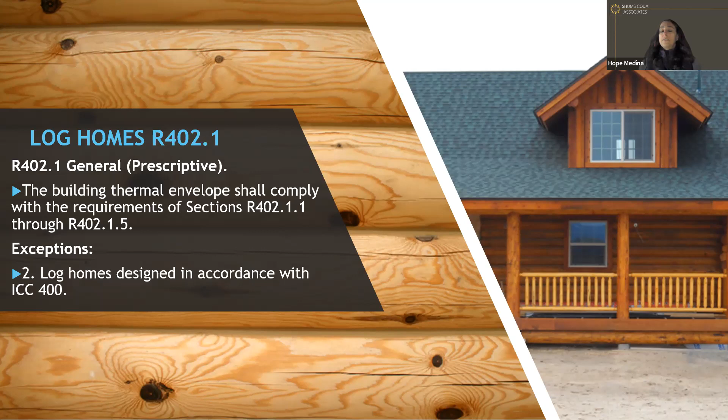So if it happens to be designed to that, whether you're on the 18 or the 21 IECC, they'll need to be designing to ICC 400, the 2017 version. Now the 2022 version just came out, but neither of those are referenced in the 18 or the 21. Also, be aware that this option for log homes and the exemption on the thermal envelope is only an option for residential projects.

So let's dive into what this standard is all about. ICC 400 is a standard that talks about the design and construction for log structures. As you can see here, it incorporates a little bit on the residential side and a little bit on the commercial side. But the only exemption is on the residential aspect, so that's what we'll be focusing on today.

So what we are going to be looking at right now is how do we deal with that thermal envelope. The intent of having that log home is so you have that outdoor log cabin feeling, where you can see the wood as you're sitting on the couch. That's the intent, not necessarily that it's been furred out so you can get insulation in the wall and have drywall. The intent is to have that aesthetically pleasing feeling of log homes.

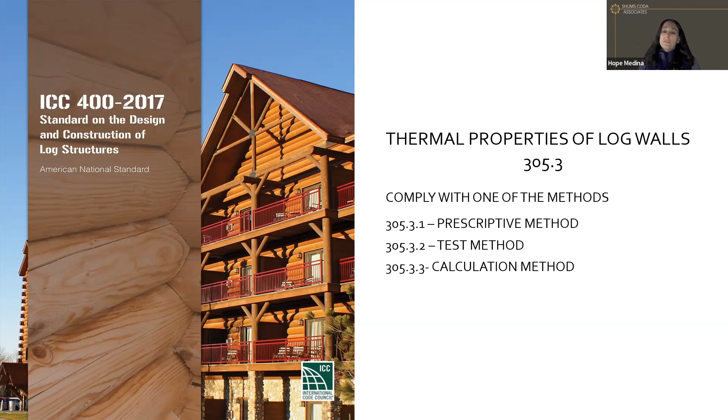So with that, how you deal with the quote-unquote R value, you have three options you're going to comply with: one is the prescriptive method, one is the test method, and one is the calculation method. Let's take a look at that a little bit further.

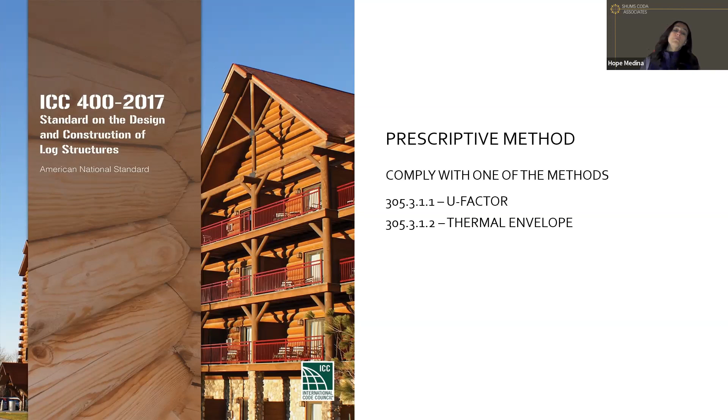When we talk about the prescriptive method, you're going to utilize one of two options within that method. You have the U factor method, and you also have the thermal envelope method. So you're either going to comply with section 305.3.1.1, or you're going to comply with 305.3.1.2.

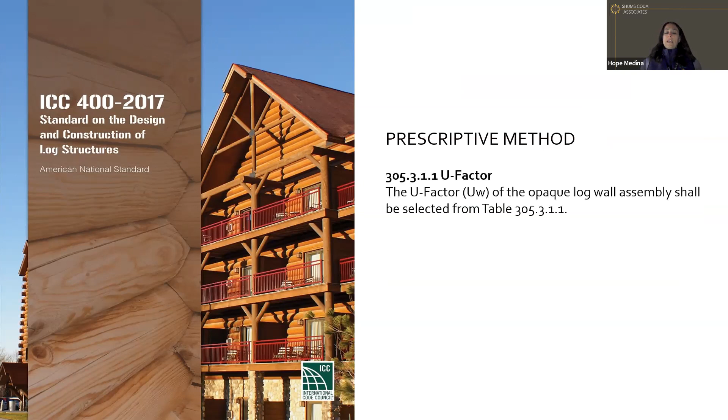305.3.1.1, which is the U factor, is talking about how the assembly works, and you're going to take a look at what you find in Table 305. This table is a little bit more complex than maybe what we're used to, because there's a lot involved with it.

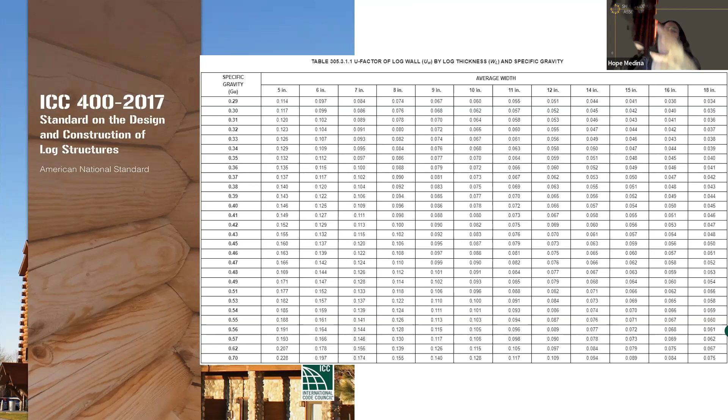So you're going to take a log, and you'll need to know what the average width of that log is going to be. That's something that should be provided on the plans. From that log, you're going to see the U factor shown here — it's a 0.0 number, and of course the lower the number, the better it is. But let's take 10 inches as an example, so we see that column for 10 inches. On the very left-hand side, you have the specific gravity, which I believe is talking about the moisture content that you're going to find in that log.

All this is provided for you as code officials — that information is provided for you. So if they are utilizing a specific gravity and it happens to be 0.29, and they are at 10 inches, then they are deemed to be at 0.060, and that's how this table is going to work.

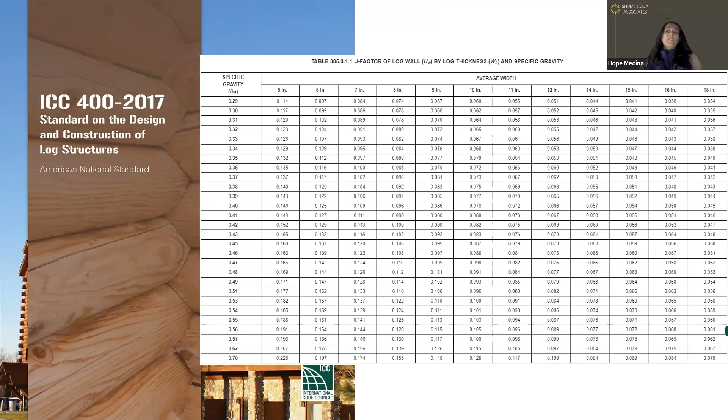Now, the thermal envelope component of it is probably a little bit more familiar than what you've seen in the past. This one looks very familiar to what we've seen within the IECC, right — Table R402.1.2 or 3, depending on which edition you're in.

We have our climate zones — we know what climate zone we're in. Now we're going to take a look and see for our log wall, it tells us what our diameter is, right? So if you are in climate zone 5, your minimum diameter of log has to be 5 inches, and it has to have the SG — the specific gravity we saw on that left-hand side — equal to or less than 0.50. Or you're going to have at least a 7-inch log, and then you can have your SG greater than 0.50.

And then, of course, you're still going to have to do your fenestration.

So you're going to follow that table. Do you have fenestration? Do you have skylights? The solar heat gain coefficient, is that part of it? All of that has to come in. And then you have your ceiling R value.

Now your ceiling R value is going to have a requirement of an R49. I know quite often there's still that desire to have that aesthetically pleasing feeling of the ceiling or roof. What I will say is these tables address walls as far as log building, and being able to use the different various sizes of log walls, but they don't really address what size of log can we utilize for our ceiling to have this particular value.

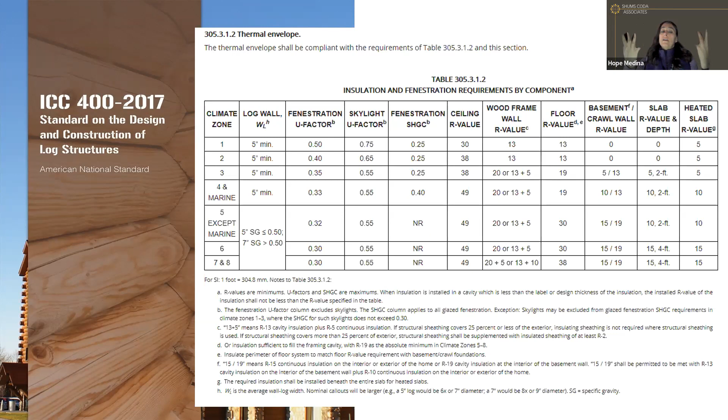So with that, it still states that you are going to need to have an R49 in climate zone 5 as your ceiling value. Now that doesn't mean you can't do it above deck and have it above deck, so you still have the aesthetic look of the wood, log, for that, but you will have to have something in place for that.

And then, of course, if you do fur out your walls and you are going to use wood frame walls, now you're going to do the R20 or 13+5, which we're very familiar with, and it's pretty similar to how you would look at it. So are your floor values, so are your basement wall values and your crawl wall values, and then your slab R value. One of the columns that, if you notice on here, is that heated slab R value.

Now that is different than the typical table that we're used to. It does have the value of a heated slab, and it states that you're going to have that R, in this case R10 continuous, completely under slab if you're going to have a heated slab.

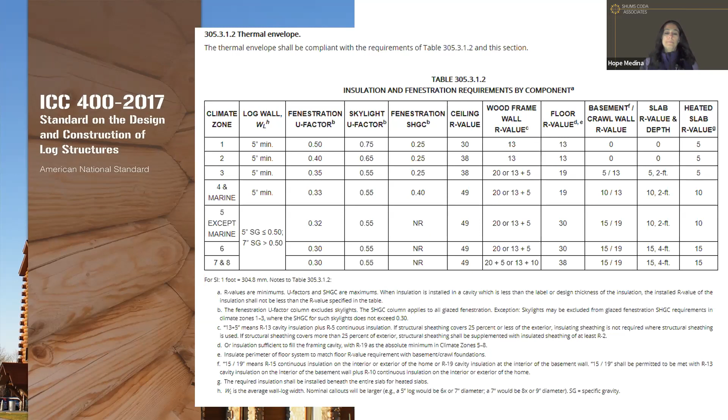So the second option that you have is going with that test method. If you don't want to mess with those tables and trying to figure out what your specific gravity is for your logs, then you have the option that you can do this test method. And what it is, is a physical testing of what that thermal resistance is going to be. And then there are some standards that are involved.

So the ASTM C177-19 is the standard test method for heat flux measurements and thermal transmission properties by means of the guarded hot plate apparatus. And then you have two other tests that are going to deal with various other components of it. And then you have this very lovely... sorry about that.

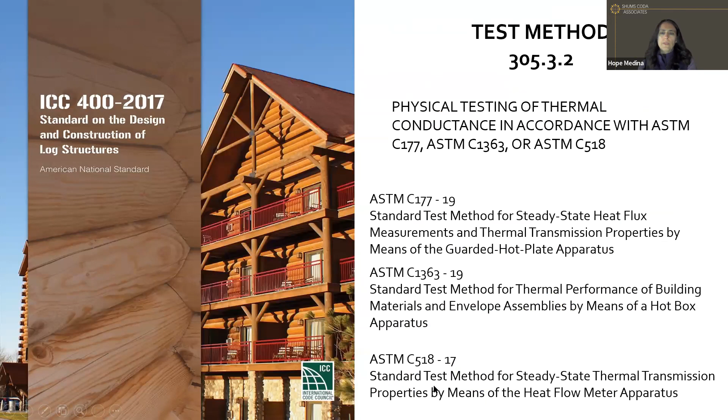Okay, we're not touching it here.

And so now we have the calculated method, and the calculated method is where you're going to start taking the coefficient of transmission of the log walls and using these particular equations. There's a very in-depth calculation that will need to be performed, dealing with inside film, outside film, size of log, the percentage of the wall that's going to be considered, that's going to utilize log. And all of this goes into this particular calculation.

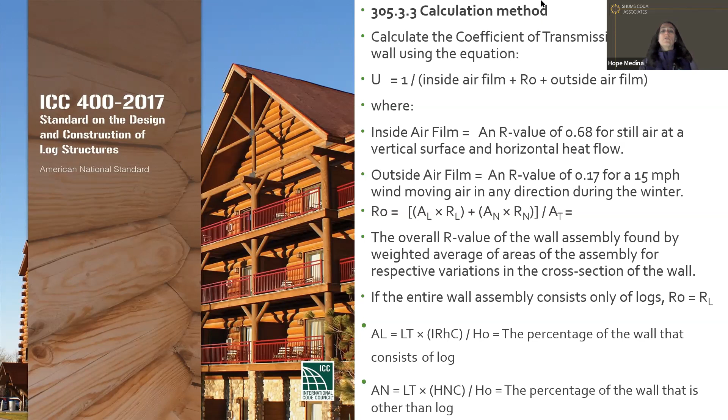Again, as a plans examiner, inspector, or builder, this wouldn't be required of you. It should be presented to show that you meet these requirements for it. And so here we go. And then here's the remainder of that particular calculation that will be utilized.

Now that we've discussed a little bit of how to determine the, quote unquote, insulation values that typically we would just see that lovely little R value on that pink insulation that makes it very easy for us to do, we still have to take into account there are other components within that thermal envelope, one being air infiltration. And I think when everything is said and done, I really feel that ICC 400 does a fairly good job in being able to address those concerns or issues.

And if you recall, if you go into table R402.4.1.1 of the IECC, that's your air barrier criteria and insulation installation table. You'll see that there's a footnote that says that log homes, when designed to ICC 400, are exempt from the air leakage requirements that you would find and required out of that particular table. And that's because they have this nice little section that deals with it.

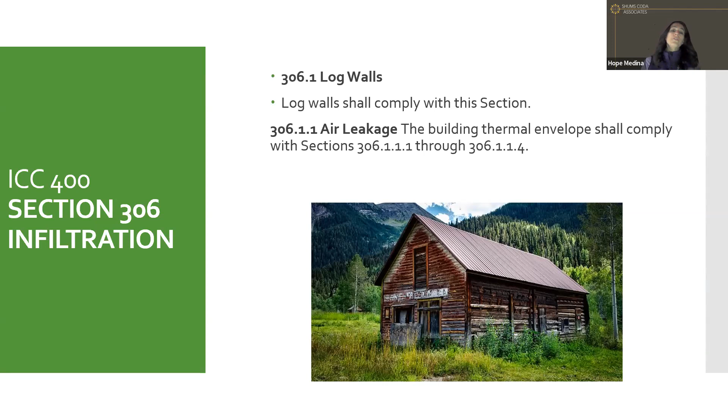So it states in here that you are going to comply with sections 306.1.1.1 through 306.1.1.4. So let's go ahead and take a look at what some of that is.

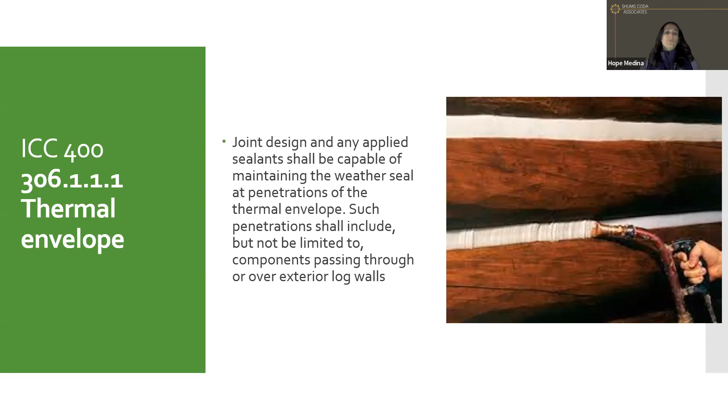So part of this talks about how you need to figure out how you're going to deal with your joints. You're going to need some sort of sealant that has to be capable of maintaining the weather seal of what's going on there, and also has that limited air movement capability. You also have to take into account the penetrations coming through this, and those penetrations need to be sealed in a way that can withstand weather and air infiltration.

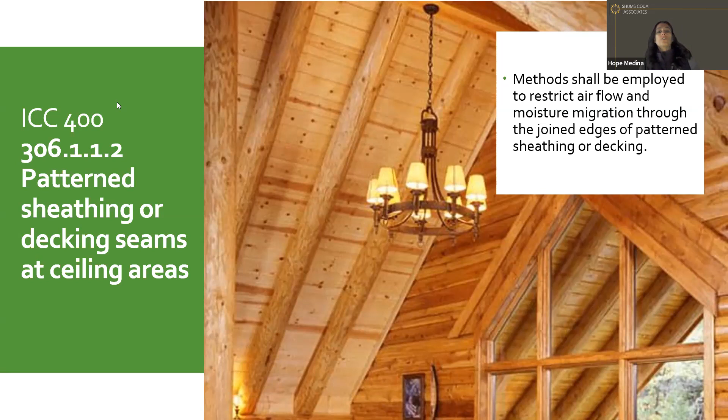Here's where the question comes into play again when talking about sealing. They state you're going to have some sort of pattern sheathing or decking seams that you'll have to address, because you don't want to leave a gap where air can come through an exposed area. You'll have to use some method to restrict that airflow, and also not allow moisture to enter into that structure.

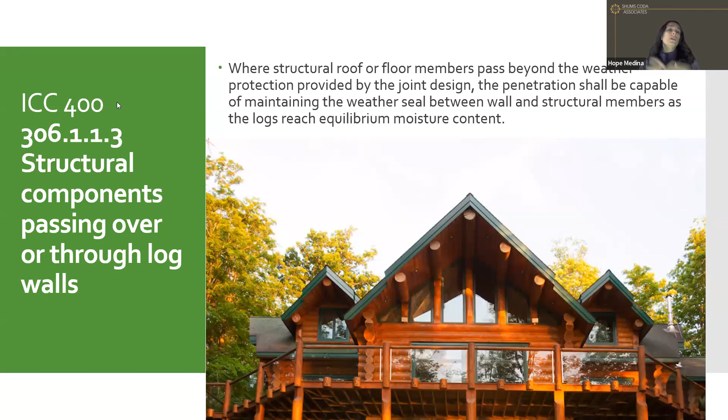Anytime you have logs, because you want that aesthetic look, often you'll see logs that go from one end of the house all the way through the other. So if you have any type of structural roof members, or flooring that penetrates through the log walls - like in that image, where the ceiling logs go all the way through the log wall - you have to make sure those penetrations maintain the fact that no moisture or weather can come in, and it also has to have a very good air sealing component.

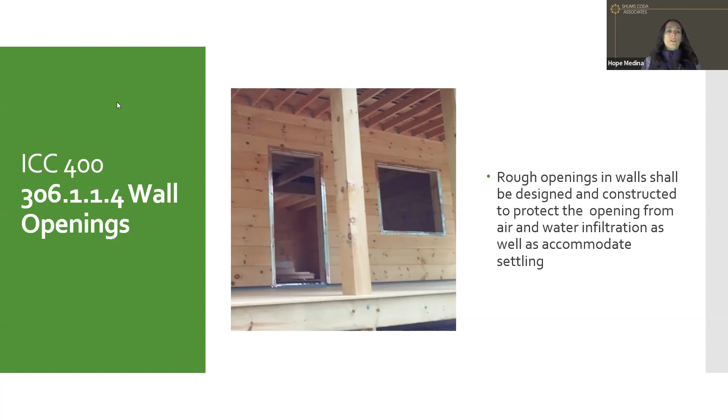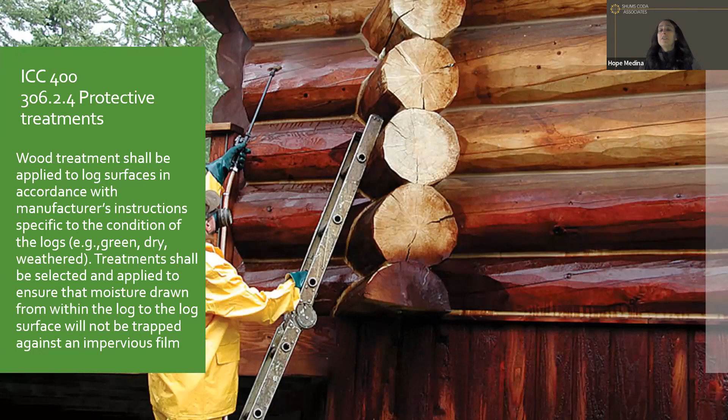Okay, so that was all the fun and excitement we had about log homes. I hope it wasn't too scary, because when everything is said and done, it's just the thermal envelope that's slightly adjusted and a bit different than what you'll see in the IECC, but your mechanical is still going to all comply, your lighting is still all going to comply, your service water heating requirements are all going to comply. The only thing that's slightly different is your thermal envelope.

So, shipping containers. I don't know about any of you out there, but I've had the fun and excitement of doing a plan review for shipping containers on the residential side, and it's a very unique concept that's really starting to take off, because it's deemed to be more of a sustainable practice, resilient practice, green practice, however you want to look at it. But it's coming into play, and with that there are a lot of questions on what you need to do, because there isn't a very specific section within the IECC, whether residential or commercial, on how you're going to deal with that.

So when we talk about shipping containers and the residential requirements, the things you think about are: okay, so I need to know how that thermal envelope is going to work, the systems, whether that's service water heating and mechanical, however it's going to be heated and cooled.

The electrical power and lighting systems, that's going to be something that's looked at. And then of course, if you happen to be under the 2021 code, your additional efficiency package options. Those are going to be very unique in how they're going to be applied when it comes to shipping containers.

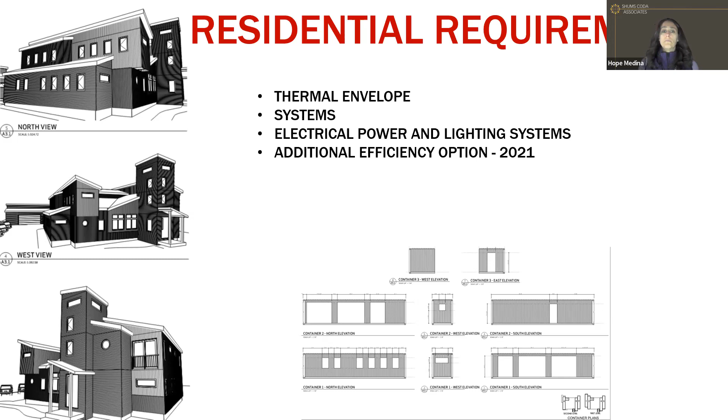And when we talk about commercial, it's the same thing here too, right? You're still going to be looking at whether or not that building thermal envelope meets everything, with the insulation, air leakage, all the fun stuff. The mechanical systems are still going to have to comply with it. The service water heating, electrical power, lighting systems, the additional efficiency package, and maintenance and commissioning, if it is required to have the commissioning for it.

And the image that you see there is, I'm trying to think of how it's called, I think it's called the Shipping Container Mall. It's an outdoor mall completely comprised of shipping containers. What you see there was the elevator that was utilized for that. So, you can use these, and they're getting used.

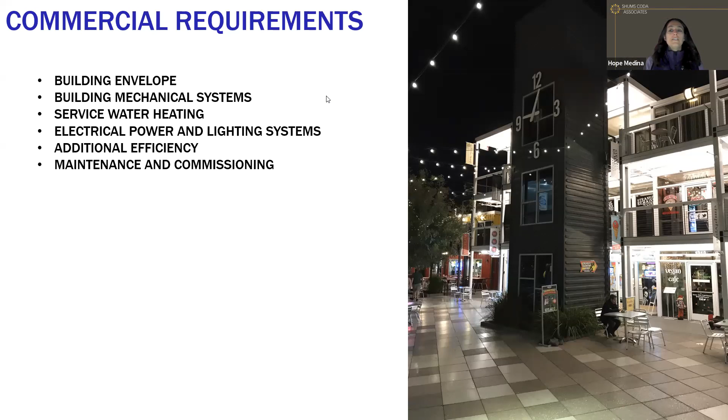So what are the things that we need to talk about when it comes to shipping containers? I think probably the biggest question is, what are you doing, whether you're designing them, reviewing them, building them, or inspecting them, when it comes to the thermal envelope, right? Because there's a lot of questions. There isn't, like I said, there isn't a table that says, hey, use me for shipping containers. There's nothing labeled shipping container table, thermal envelope, the components.

So what is it that you're going to use? What do you need when it comes to your insulation requirements? I've had several discussions actually with ICC, and the approach that is really being recommended - residentially, they're saying that if they're going to utilize the shipping container and it's going to be a component of an assembly, that really how you should be looking at it is using either table

402.1.4 if you're in the 2018, and 402.1.2 if you're under the 2021, which is your U factor table, that assembly approach, right? You're going to take the metal sheathing, that metal exterior of the shipping container, and then whatever type of assembly that you're going to utilize, and add everything together to see what it is and how it's going to meet these particular values.

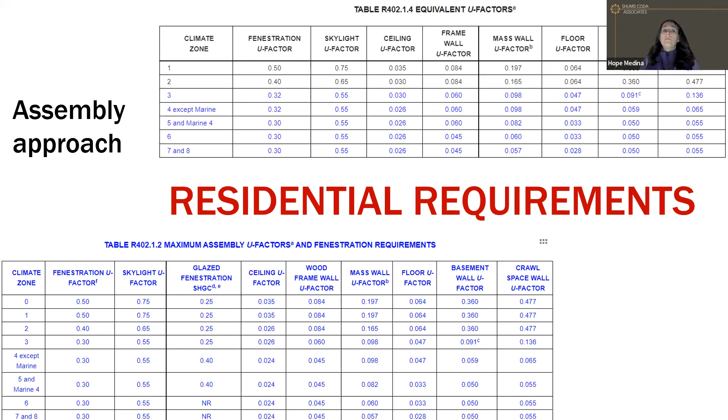So you have to keep in mind too, if you're designing or doing a plan review, are you trapping moisture in a wall, right? So we want to make sure that the walls have the capability, if some sort of moisture gets in, that it's able to escape. So that's where really thinking about how that assembly approach is going to work.

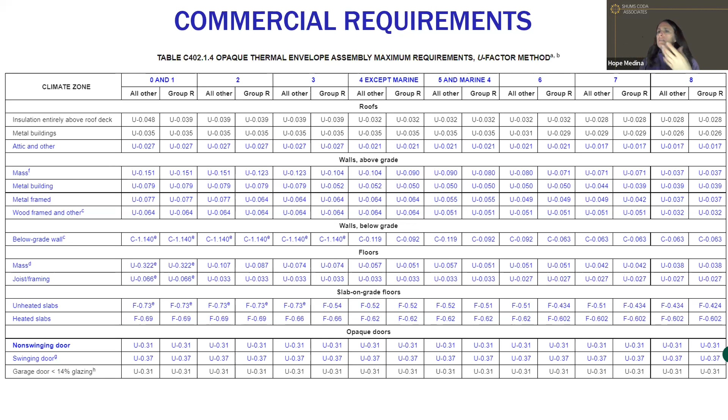Now, the other thing that you have to think about is air barriers, right? It's not just black and white as far as how you deal with this type of material and structure, and make sure that you comply with how the air barrier and air sealing is set up. So let's talk about what you're going to do on the residential side of things.

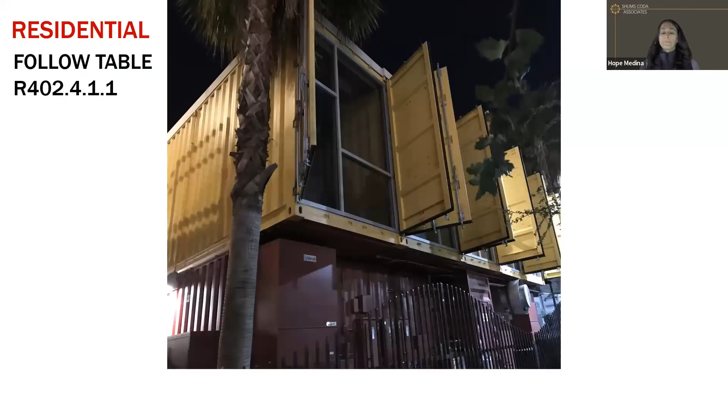So residentially, you are just going to follow table R402.4.1.1, right? That's the lovely table that gives you the component, and then tells you in the next column your air barrier criteria.

So you have, let's say, your ceiling. Well, your ceiling is now going to have to make sure that the air barrier in any drop ceiling or soffit shall be aligned with the insulation, and any gaps in the air barrier shall be sealed, and the access openings, any drop down stairs or knee wall doors to unconditioned attic space shall be sealed. So if you have that condition in that shipping container, that's what you're going to do.

But basically, you're still following this table, and it's going to get you to being able to do a blower door test, right? Because that's the intent of this, it's a roadmap to lead you to success. And it doesn't change if you happen to have a shipping container. There's no exemption saying, hey, you are exempt from the blower door test if you utilize a shipping container for your home. So with that being said, you're still going to want to really follow the components and the information that you find.

And in some of the areas, you probably are going to want to follow it very, very closely. So you have that shipping container and you've got your nice tub that you like to relax in, have some music on, candlelit, and just decompress from the day. You don't want the cold air and the coldness from that metal that's your exterior now, basically sucking all the warmth out of that tub. So you're going to make sure that you've got that air barrier, you've got that insulation there so that you can still enjoy the warmth of the tub.

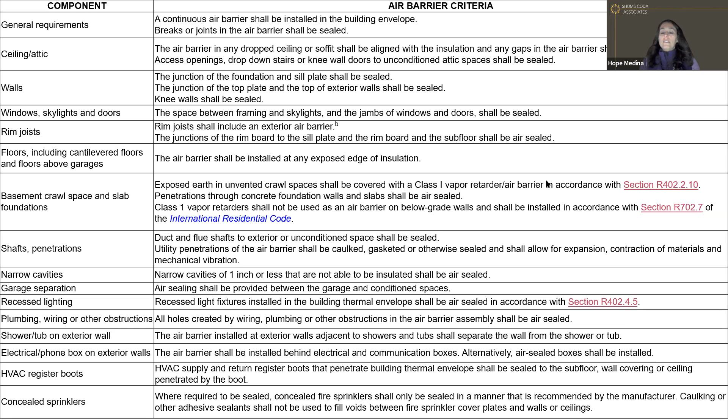And so there's probably a little more things that you might really focus on a little bit more dealing with that steel metal structure. Now, when we talk about the commercial side of things, this is where it kind of gets a little bit more complex than on the residential side.

And so if you are in the 2018, you're going to follow C402.5, which is the typical air leakage section. Now, for the 2021, again, you're going to utilize C402.5, but remember that air leakage testing may be required for these. So you have to keep that in mind and you have to really kind of think it through.

And so for the 2018, you still have the option and you are still required to either utilize the material option, which in the IECC, you have those 16 already deemed to comply materials that can be utilized. It does have sheets of steel that's on there. I'm not sure that this would necessarily comply with that, but it's something to maybe keep in mind, or the assembly approach, not necessarily seeing that there's going to be an assembly approach used for the shipping containers, or you can do the testing.

Now in the 2021, again, you can do the material, or you can do the assembly, or you can do testing, but for certain occupancies, it is required that you have to do the testing for it. So whether you use material or assembly, you are going to be doing testing. And then also keep in mind too, that the building envelope performance verification is going to be required. So these are all things that you're going to have to keep in mind when you start thinking about what you're going to do for air leakage on the commercial side with the shipping containers.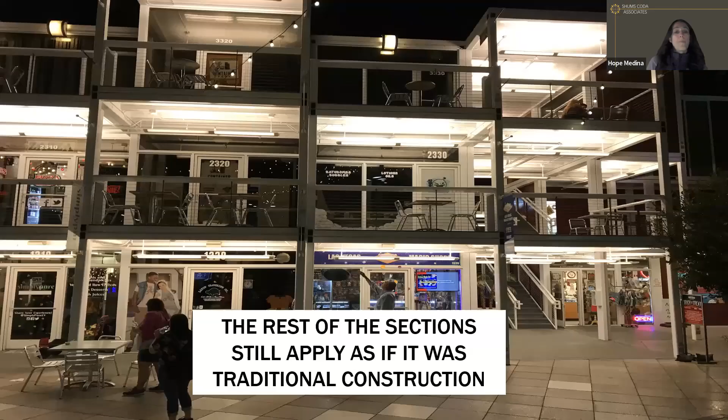Other than the thermal envelope components, the rest of this is going to comply with the remainder of the IECC, meaning your mechanical is going to comply with the mechanical code. You're going to have to do your load calculations, whether it's a commercial load calculation or a manual J calculation. You're going to need to do your service water heating, any of your electrical, doing your watts per square foot, or the amount of high efficacy bulbs installed, whatever the case may be. Those still apply as if this was traditional stick framed construction, so all of those still comply.

Where there's any sort of question, it really comes into play for your thermal envelope components.

All right, car washes. I get questions quite often about car washes, and there's a lot of reasons for that, because everybody thinks about this and they're doing their due diligence, wanting to do what's right when it comes to energy and dealing with this unique question. So why are these car washes such a great question?

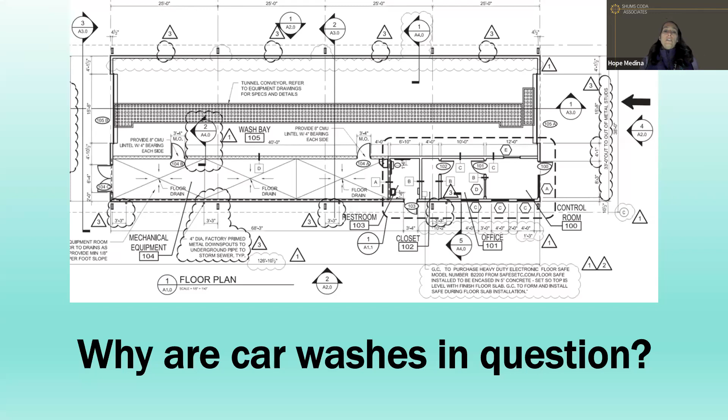The reason for that is, when you look at this, what do you see? You're seeing that there's a question about whether it's going to be conditioned, and where that thermal envelope is going to be at. The thought is we're trying to make sure everything is insulated where it should be, everything is sealed where it should be, and that we don't have really big holes in our thermal envelope. But what does a car wash have? We have a nice little giant hole on one end of the building where the vehicle enters, and then another giant opening on the other side where the vehicle leaves the car wash.

So there's a lot of questions. What happens? What do I need to look at? What's all involved? I think one of the first things you have to figure out is, are the spaces being conditioned?

So, there we go. This particular area on this plan, you can see there's offices, there's a bathroom, there's a control room. Those are areas that are probably, one way or the other, going to be conditioned. And then you have other questions, right?

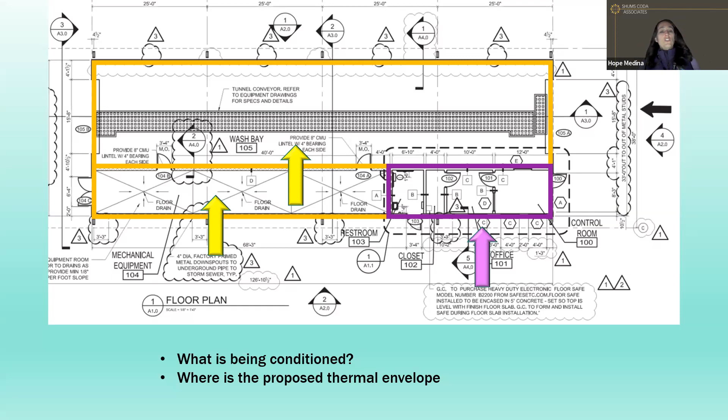If it's going to be conditioned, then chances are it is going to be required to have a thermal envelope, but maybe it isn't. So if that particular space, basically where the cars go through, may qualify as a low energy building, and if it happens to be separated from the remainder of the building that is actually conditioned, it would be exempt from that thermal envelope. So that top yellow area, if it meets the requirement of 3.4 or less BTUs per hour per square foot, or 1.0 watt per square foot of floor area for space conditioning, it is exempt from the thermal envelope.

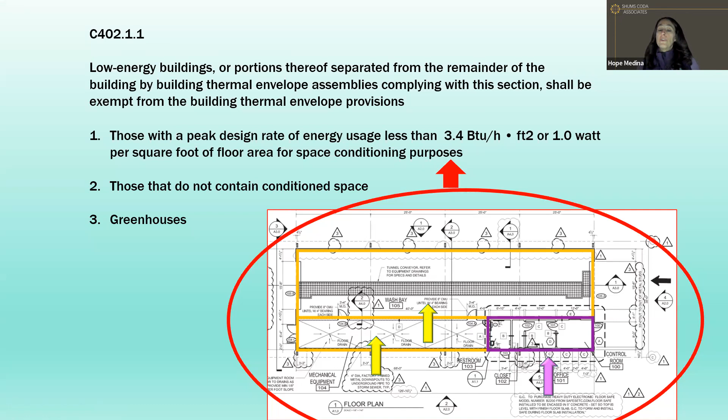So how do we determine that?

Well, to figure out whether it's going to be a low energy building, you have to find out whether or not it's going to be conditioned. Here in Colorado, quite often when I'm getting these car washes, they are wanting to heat it. I have various degrees of how much they're wanting to heat it. Some car washes only want to heat it to like 40 degrees, just above freezing, enough to where the water won't freeze and cause issues with the car wash functioning, making sure none of the piping freezes and bursts, to where they want it fully conditioned as if people were living inside.

So those are the two types of situations you're in. If they're going full force - I'm going to condition and heat this place because I don't want it to ever have the opportunity to freeze - at that point, they probably aren't going to make it as a low energy building.

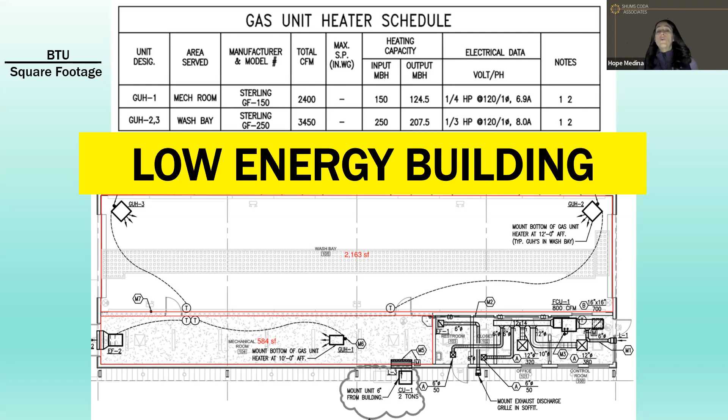But in this particular plan that you see here, you probably notice that they have two heaters there, right? We've got number 2 and number 3 that are heating that top area that was in question. So if we add together those BTUs, we have 207.5 - the total is 415 MBH divided by the square footage, which is 2,163 square feet. You can do the math and see that they definitely are going to exceed that 3.4. So they are not going to qualify as a low energy building.

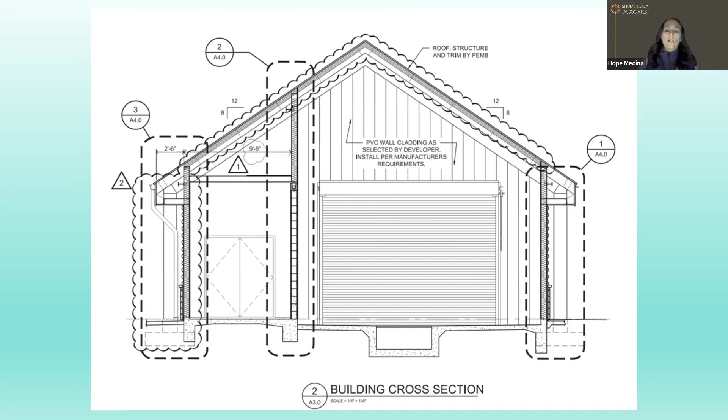So now, as you can see here on the plans, what they did do is they have a nice little thermal envelope here where it does completely do the exterior walls, and then a nice little area here too, where they were doing some more separation as far as where that thermal envelope is. So insulation of the thermal envelope is what we're going to be looking at.

The question is, if they are putting in a thermal envelope, you're just utilizing the values and requirements out of C402.1. If they're putting in any sort of fenestration, it's going to need to comply with C402.4, for your U-factor and solar heat gain coefficient. Your air barrier requirements are going to kick in, so you're going to go to C402.5. And if you have fenestration, you need to make sure it meets the air leakage requirements in table C402.5.2 if you're in the 2018, or C402.5.4 if you're in the 2021.

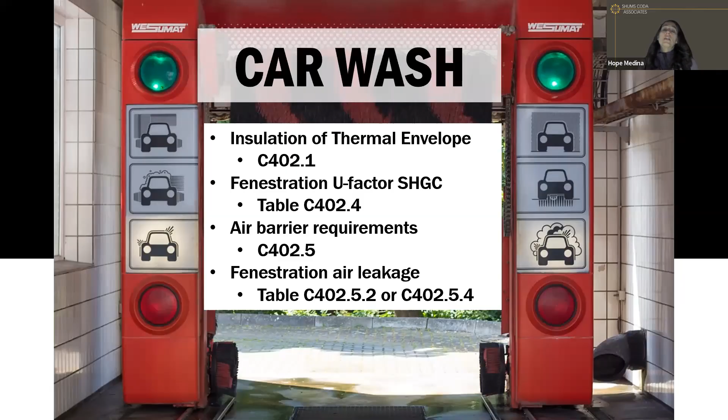Now, if you are in the 2021, there is another provision you're going to have to be aware of - operable openings and the interlocking of it. Where there's an occupancy utilizing an operable opening, you know, those big giant garage doors you're seeing quite often - if it happens to be larger than 40 square feet in that particular area, then that opening has to be interlocked with the heating and cooling system so as to raise the cooling set point to 90 degrees and lower the heating set point to 55 degrees whenever that operable opening is open. The change in heating and cooling set points will occur within 10 minutes of that opening happening.

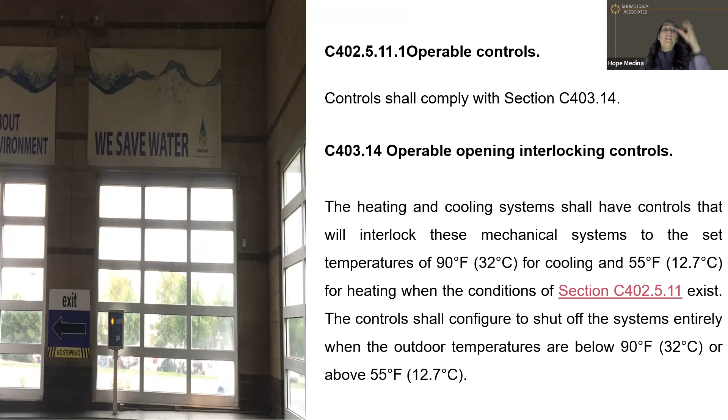Now, there are some exceptions to this particular rule, but when we start talking about car washes, they really don't fall into any of these particular exceptions. The operable controls required just state that the heating and cooling systems must have controls that will interlock with these mechanical systems to change the set point - cooling at 90 degrees Fahrenheit and heating to 55. They also have to shut off the system entirely if that outdoor temperature is below 90 degrees Fahrenheit, or if it happens to be above 55 degrees. So these come into play here as a requirement to keep in mind when dealing with car washes. That will come in the 2021.

Now, let's talk about greenhouses and grow facilities.

Keep in mind these are two very separate concepts. There's a definition when it comes to a greenhouse: a structure or thermally isolated area of a building that maintains a specialized sunlit environment exclusively used for and essential to the cultivation, protection, or maintenance of plants. If it meets that definition in the 2018 code, it is exempt from all the building thermal envelope requirements.

Greenhouses are grouped in section 402.1, which covers low energy building sections. So if it happens to be a greenhouse, it's completely exempt from all the building thermal envelope requirements. You skip section C402 entirely and move to the mechanical system, the service water heating system, the electrical system, and any other sections that apply.

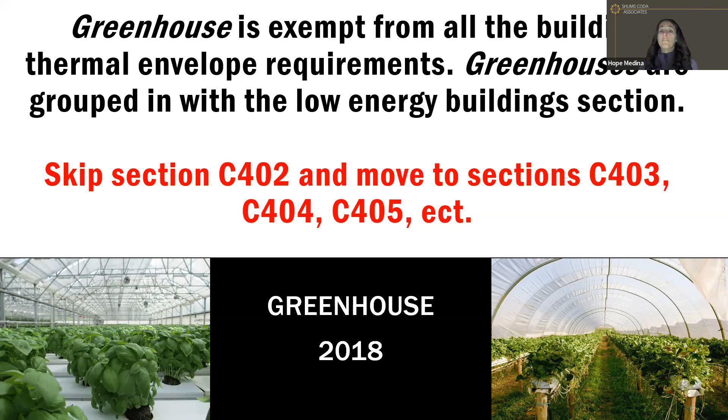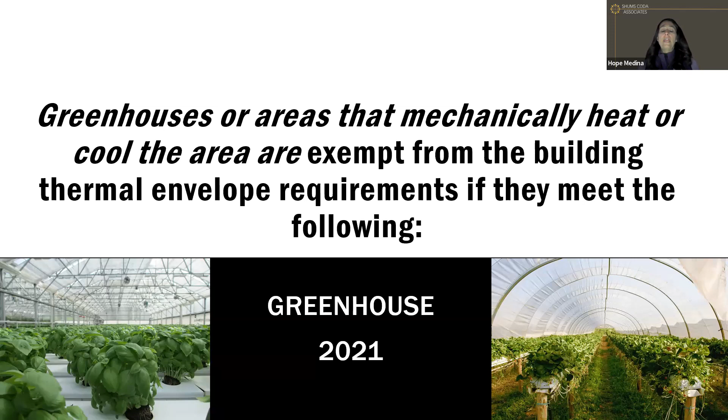Now, if you're in the 2021 code, greenhouses or areas that mechanically heat or cool those areas are exempt from the building thermal envelope requirements if they meet the following requirements: if their exterior opaque envelope assemblies comply with sections C402.2 and C402.4.5, except for low energy greenhouses that comply with C402.1.1, which we just showed with that 3.4 BTU calculation.

Or if their interior partition and building thermal envelope assemblies that separate the greenhouse from that conditioned space meet those particular sections, and the fenestration assemblies comply with the thermal envelope requirements in table C402.1.1.1, and the U factor for a roof for that assembly shall be included in this.

So basically what they're saying is if you choose to heat or cool that greenhouse, there are a few items you'll have to comply with. The intent when this originally came in was that the sun was going to be doing all the work, so there was no need for heating or cooling for the most part. But more and more was happening under greenhouses.

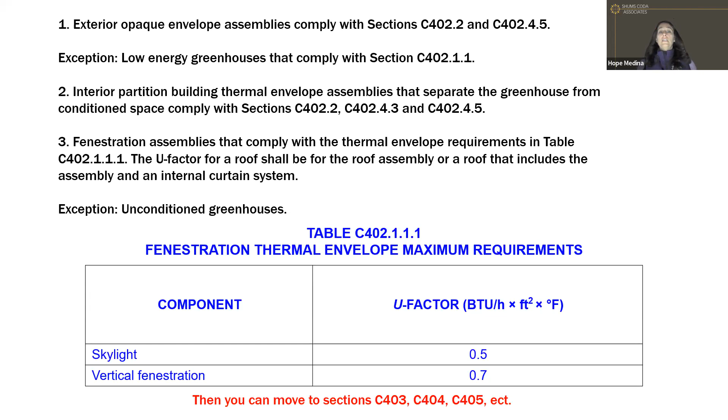So in the 2021 code, they said there's no reason why, if there's an opaque portion of that thermal envelope, it shouldn't comply with those particular requirements—just making sure things are following along with that. So these are the new requirements for greenhouses in the 2021 code.

Now, mechanical always applies, right? Does it apply? If you're utilizing any sort of mechanical and ventilation equipment in these particular grow areas, it probably comes into play more with grow facilities—and grow facilities, by the way, doesn't always mean marijuana. Grow facilities can be tomatoes, basil, anything that's green and planty.

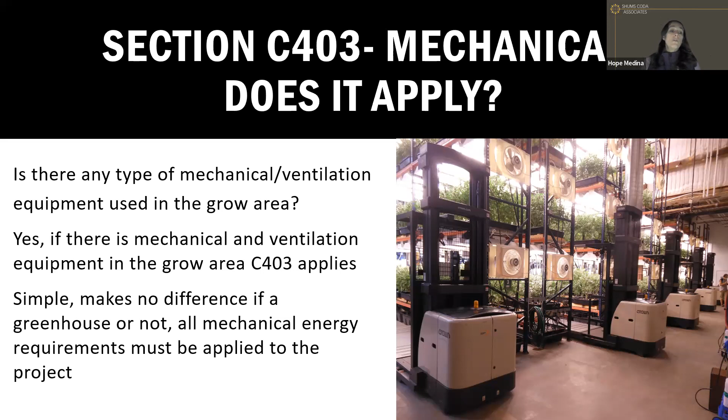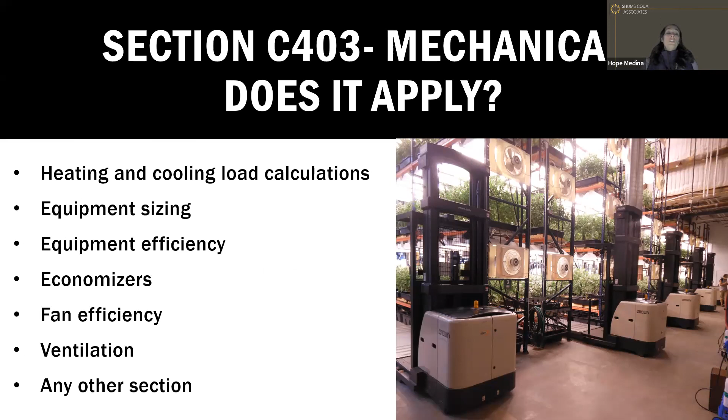So it doesn't matter what that green plant is—if you're utilizing any sort of mechanical heating or ventilation, you're going to be using C403 and complying with that. That means your heating and cooling load calculations have to be supplied, along with equipment sizing, equipment efficiency, economizers, fan efficiencies for ventilation, and any other section involved with the project.

Electrical power and lighting systems—does it apply? Is any type of electrical lighting used in cultivating these particular products? If there is, C405.2, the lighting controls, are things to keep in mind, because the intent of this section is to make sure when the lighting is not needed for human use, and that there are controls that can turn them off.

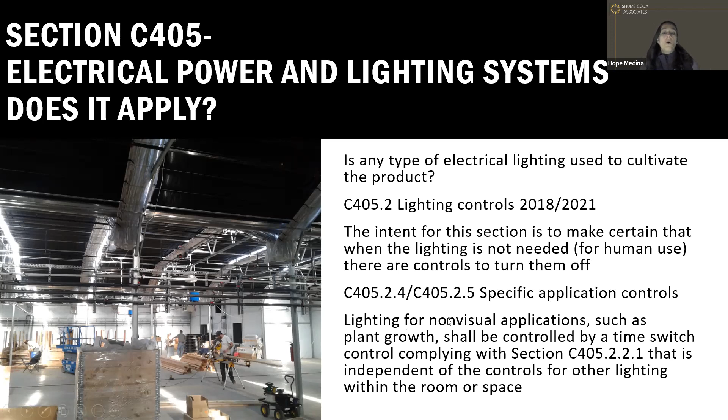For specific application controls—C405.2.4 if you're 2018 and C405.2.5 if you're 2021—the lighting for non-visual applications such as plant growth shall be controlled by a time switch that complies with section C405.2.2.1 and is independent of the controls for other lighting within the room or space. That was a lot, but those are some of the required controls.

Now, we all know you're going to need to do that interior lighting power density calculation. With that, you start adding up lights, what the wattage is, where it is, what type of occupancy or function that space has, and that determines how many watts you get. Now there is an exemption from that: task lighting for plant growth or maintenance, because the intent of that lighting is to grow the plants.

Limiting the amount of wattage for it is going to be very difficult for that, right? That's not what we're trying to do.

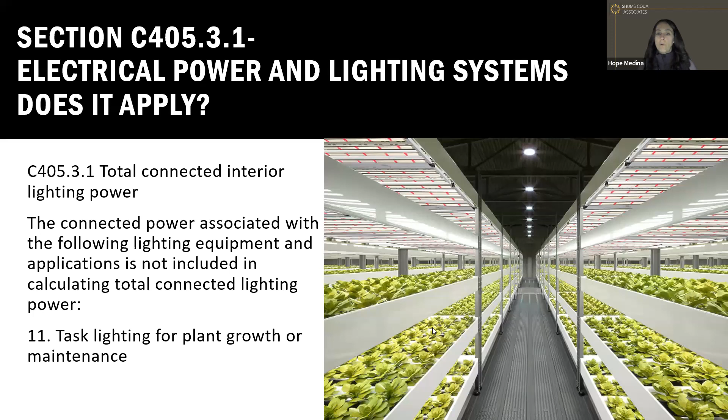There is a new section that came in for the 2021 code to kind of alleviate all of the questions or concerns about energy efficiency in these particular grow facilities, because you've seen the images on the screen and they demonstrate there's an awful lot of lighting that is being included with that. So in the 2021, they wanted to address that. There's a new section, C405.4, and it talks about lighting requirements for plant growth and maintenance.

What it says is not less than 95% of those permanently installed luminaires used for plant growth and maintenance shall have a photon efficiency of not less than 1.6 per joules, as defined in accordance with ANSI and ASABE S640. I apologize, I cannot say it, I will butcher it, but it's blank joules, sorry.

The reason for that is because everything is kind of put into that lumens or watts term. And really, when everything is said and done, lumens are for humans. That's the light spectrum that humans deal with and what we use. And it doesn't really correlate for how plants utilize the light spectrum. So trying to regulate lumens doesn't make sense when you're talking about plant growth.